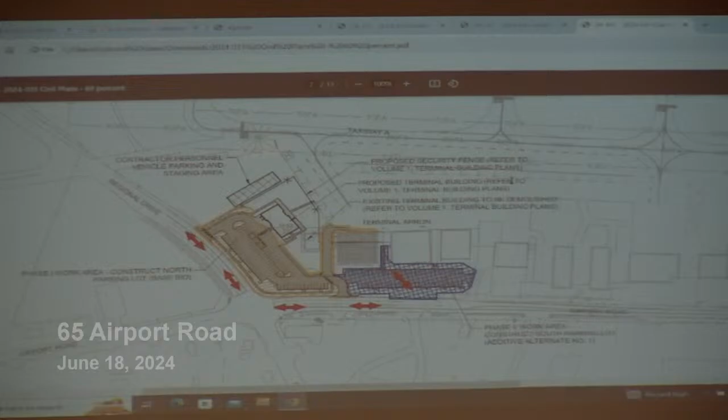The design that's in front of you here tonight is at approximately 60% completion, and it's likely to change quite a bit between now and actual construction while we work through the process with the federal government. The design of the project is the result of a 2019 collaboration with city officials, community members, and airport stakeholders. The idea was to reimagine the airport terminal into something that both aviation and non-aviation users would be attracted to use. The current design is to reorient the terminal so that it's the focal point as you approach the intersection of Regional Drive and Airport Road with a more modern design terminal building. We're proceeding through the process now under RSA 674:54, which governs governmental land uses, in which governmental land uses will appear before the planning board and will take comments from the public and the board and receive feedback on the normally applicable land use regulations that the community has.

We will take that feedback back to our design team of Jacobs Engineering and incorporate as much of that as is feasible to do through the grant process and through the design process. And our goal is to comply as much as possible with the city's regulations as we move forward. We certainly would appreciate any feedback that the board and the public has here tonight. We've already received the memo from planning staff and engineering staff, and we will work to incorporate that as much as we can again in the project.

Martha Drufker from the engineering division is the lead from the engineering side of things for the city, and I know that she's working closely with Jacobs to try to ensure that as much of the project is compliant as possible. We're going to endeavor to do as much of this as possible. There is a fairly tight time frame with the federal grant guidelines that we are hoping to get through and out to bid within the next month or two, which is an extremely compressed time frame because we just started getting into design of this in March, really.

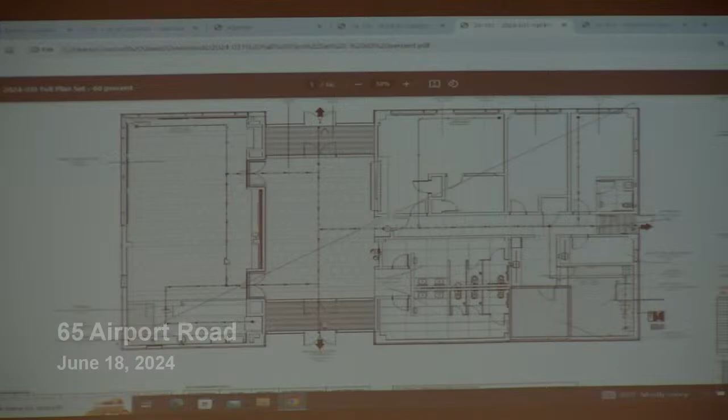This is still intended to be a general aviation airport. We're not looking to do passenger service here, obviously. But we are hopeful that that space could be utilized by community groups and others as an opportunity to both showcase the airport and bring the community into the airport that typically doesn't visit there today. Okay, great. Councilor Todd? Yes, thank you. While you have that up, can you just point out what the other spaces are? Sure.

In this drawing, what they'll be utilized for? Generally speaking, this area here would be the counter for the car rental agency, airport manager's office, some tenant space potentially in this area here, pilot's room here, men's and women's rooms. We scroll down here. This is the electrical room, and this is a pilot area for them to, if they need to get some rest, take a nap, get some separation from the general public. And then the main lobby and the public circulation space.

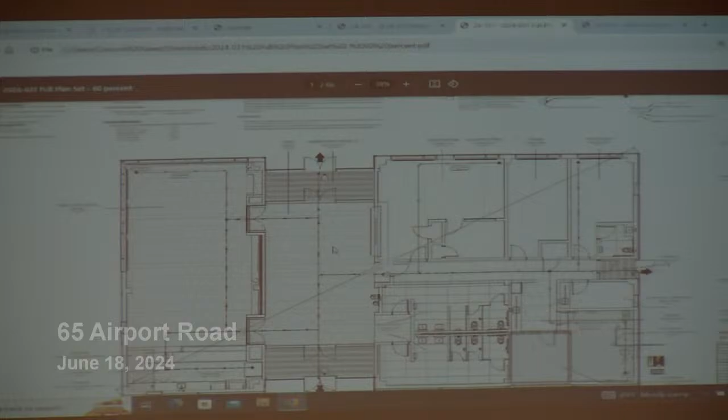How many square feet, Tim? Roughly 5,200 square feet. So it's a good size, not a tremendously large facility. And single story? Yes. Follow-up question. Sorry, if I could. Yeah, thank you. No, it's all right.

So there's no space set aside, for example, for an aviation flight school? Not in this area currently, although that tenant space could potentially be utilized, and I think the original design from Jacobs was assuming the FAA may need some space in there, but based on conversations as we've gone through in design, it's not necessarily that they would need that much space, so there may be opportunity for the city to obtain some lease revenue from that space.

Dina, follow-up to Councilor Todd's question. Pull a little forward so they can hear you. Sorry. As a follow-up to Councilor Todd's question, is the flight school gone that was there before? There was one in a building over. They're still there, to my knowledge. I have not been informed that they've left at this stage.

And I know one of the concerns that our current airport operator has, the existing terminal and the really early on design had some overlap with the proposed new terminal, and there were questions about whether or not we would be able to do full demolition and then construction. The commitment by the city at this stage is we're shifting the location such that we will be able to keep the current terminal open until the new terminal building is complete, so there should not be any downtime where we'd have to temporarily relocate anybody out of the terminal.

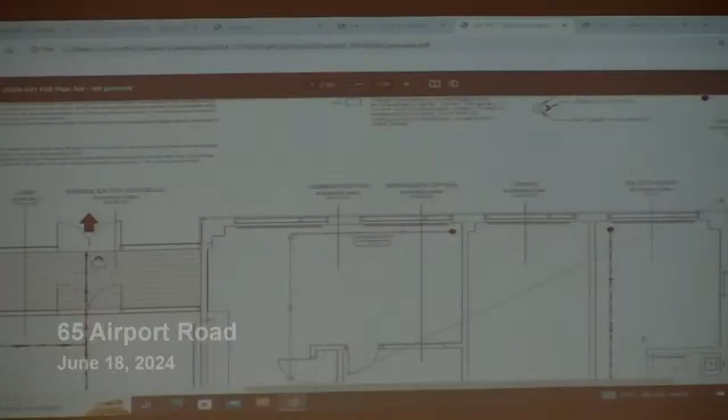Okay. To follow up again, do you know offhand what the space is of the current flight school? I do not. It might be bigger than that. That's what I'm wondering. I think we have some public testimony coming that may address that, so we'll let that come up when it comes up. Okay. All right, thank you. Jeff?

So I think engineering did a great job going through these. A couple of things that I'd like to reiterate are the locations of the driveways to the intersections and the need to cut through some of those long queues that happen at that signal to get in and out. The crosswalk, when you first come in that main driveway off of Airport Road, is at such an acute angle. If there's a way to shift the parking over or take one parking space out there and add it someplace else, to straighten that crosswalk, I think that'd be highly advantageous, unless that little section is gonna go away because the sidewalk's going diagonally into the intersection. We're in complete agreement that those things need to be taken care of.

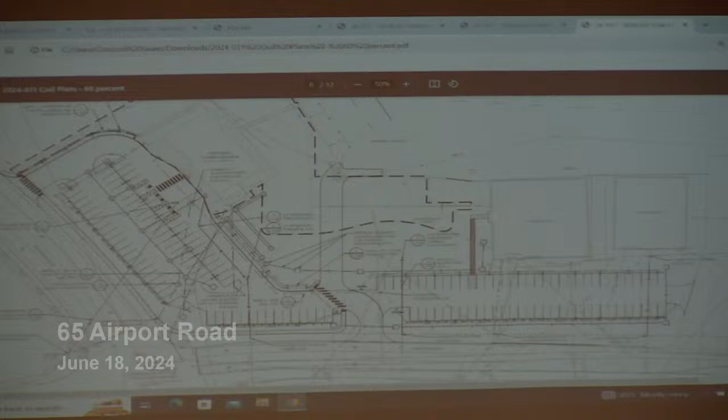The other thing I noticed, I forget which plan it is, I think the utility plan shows a future handhole for vehicle charging stations on the southwest corner of the main parking lot island. The way it's laid out, that would preclude having any ADA spaces with EV charging potential. So if it's possible to also put a box maybe at the other end. Sure.

That would be great, because they also have electric cars, and as the future goes forward, more and more people will. Separate grant applications that are in the future for me, yes. But I'm just saying, if we can at least install the conduit and that pull box or whatever's needed, I'm not saying you have to install them. Sure. But at least you don't have to dig the parking lot up again to do it. That's the big issue. Understood. Thank you. That's all I had. Okay, good.

Thanks, Jeff. On the plan that you've got contractor, personnel, vehicle parking, and staging area on the inside of the fence. I don't see a road or anything that's there. I don't know how that's serviced, but I don't know what the plan. Trying to think which plan. It's the second sheet in on my packet. The civil or the full? Civil. Civil, all right. G100, the general plan. Yeah, G100, 2 of 12.

So it's your colorized one that you had the blue hatching on. So it's got a little box hatched out there that says contractor, personnel, vehicle parking, and staging. Is that a permanent, or construction? No, that is not permanent. That's just for construction. Okay, perfect. Okay, any other questions?

Dina? It's a beautiful building. I can't say I've seen something like this in New Hampshire. What type of glazing are you using? Will it be comfortable in the winter? I know winters aren't as cold as they used to be, but that is a lot of glass. I'm not going to be able to speak well to the actual architectural design and glass standards and glazing. However, based on the conversation we had with the Architectural Design Review Committee and the process that's been ongoing since 2019, we're confident that this is going to be more than energy efficient and should work well. Triple glaze and that kind of thing. Yeah. Okay. Hang on, I got David Fox, yes.

Just an interesting question. Do you have any data on utilization? I know other than race week, when all the corporate jets are in there, typically, I know general aviation. So I'm looking for what's going to support this particular investment by the city in terms of its utilization? I will allow the airport manager, who's going to be coming up for public testimony, to probably answer that in terms of statistics.

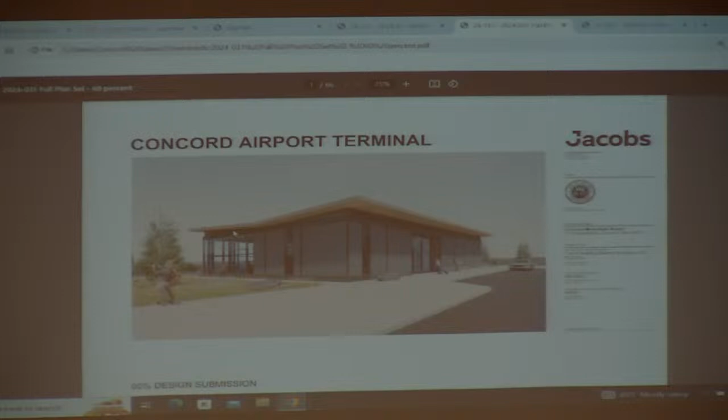Yeah, I'm just wondering if the roof is meant to look like airplane wings? If that was intentional? Not having been here in 2019 when it was designed, I know it went through a public process with stakeholders and the public and resulted in that design. That's pretty cool. And the other question that came at ADR was, yes, there is appropriate drainage set up to handle the roof drainage off of that.

Make sure it's not built by Boeing. We'll have to worry about the bolts falling.

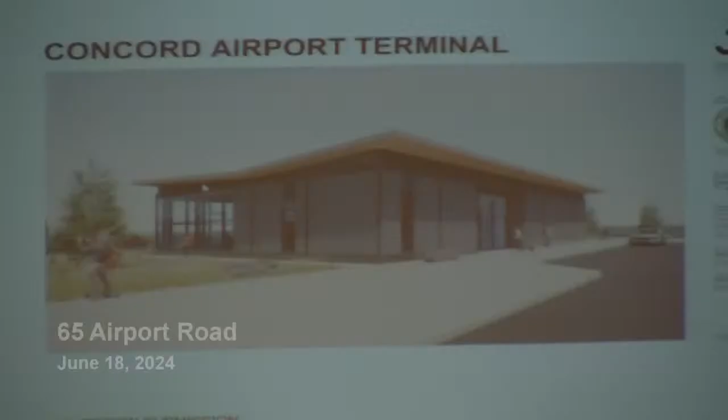Yeah, that's right. It couldn't look more different than the new building across the way, so you got contrasting wood and arch frames. Any other questions from the board? Any member of the audience have any questions or concerns about this? I'll let the manager come on up if you can answer a question.

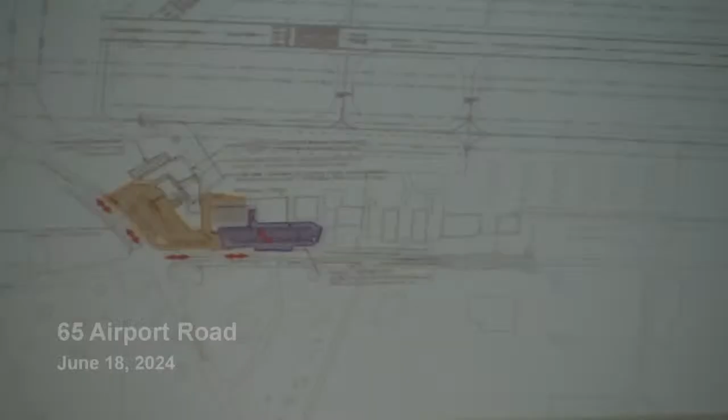Looks like you got a big office here in this whole building. Cut that in half and make it a space.

Welcome to the table. If you could state your name for the record. My name is David Rolla. I am your current airport manager and operator for the city of Concord.

Great. I apologize for my condition. I feel like a burnt tater tot after 12 hours outside today. Well, you don't look like a burnt tater tot.

So, as you said, we're gearing up for race weekend, and rental car people are already starting to arrive. Had 7 or 8 rental cars go out just today. And we're looking forward to a busy weekend. So I saw your hand go up, but I don't remember what the question was. I think that particular question was around the flight school, the councilor's question about, is the flight school still there?

Yes, our flight school is still there, and the relative space we are operating the flight school out of right now is about 1,600 square feet, less the rental car counter that's in that same space. They probably have about 200 square feet. We haven't quite figured out, you're right, that area that's lined up as airport manager's office, I think it would be more appropriate to call it airport operations area.

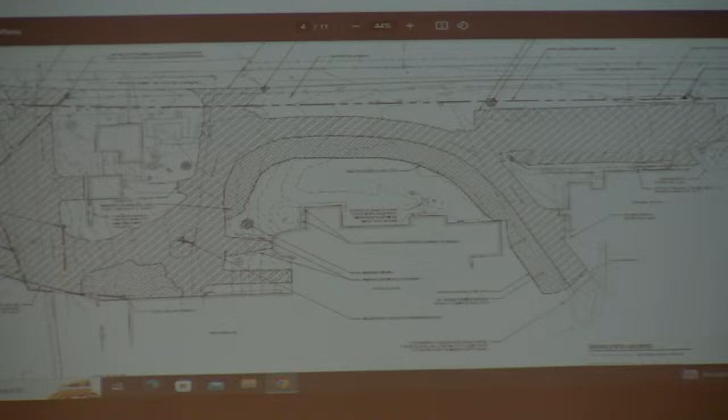Okay, so on the right side of the plan, all the way to the right side? So it's literally right about there. There's your signs that you're showing reinstalling on city property, and then there's a tree right there. It's quite large. It's gotta be at least 4 feet in diameter. It's enormous. And it's got big arching branches. And it's not a maple, I don't know what it is, but it's different.

I wish Suzanne was here. She's probably yelling at the TV now, telling me what it is, but I don't know what it is.

Okay. Well, I'll certainly have that. Anything that can be done as far as protecting the root system in that area would be much appreciated. Yeah, well, if it's on your property, then I'll make sure that we protect it and don't touch it.

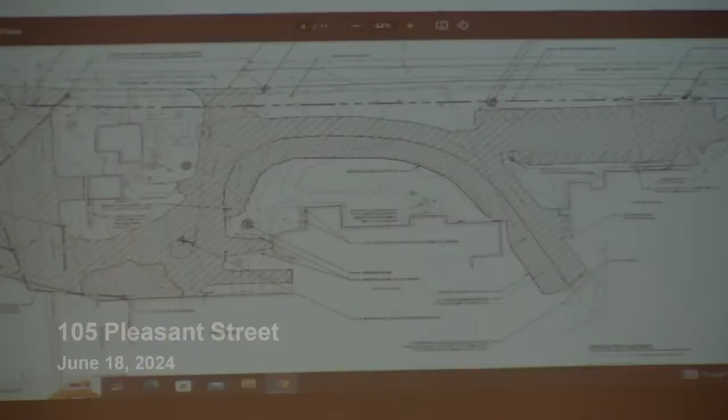Okay, I see another hand. Matt? Yes. Question is, I'm looking at Google Maps right now, and it looks like there's 4 curb cuts existing along Pleasant Street. Are there still going to be 4 curb cuts, or are we going to try to reduce any of those? It didn't look like any were being reduced. I think there's 3. It looks like the first one going up Pleasant Street services the old doctor's houses. Then the main one, and then the single one that goes into a parking lot. I don't know what that one is.

Maybe that's not a curb cut. I think there's only 3. And then Industrial Drive. Okay, I'm just curious. No, that's fine. We're planning on basically keeping everything as is, but just renovating, updating the base. Alright, thank you.

Okay, other questions? Any member of the audience have any questions or concerns about this application? I'm losing people left and right here. Okay, thank you very much. There's no action needed by the board, so we don't need to do any motions. We will let you go. Thank you very much, all. Appreciate it. Thank you for your time.

All right, that brings us to 8H on our agenda. If we could read item 8H into the record. New Hampshire Land Consultants and New Hampshire Sustainable Communities LLC, on behalf of Thomas Cheney, request approvals for a major site plan application, architectural design review, conditional use permit for driveway separation, and a condominium subdivision application for an 83-unit condominium development at 153, 159, 165, and 169 Fisherville Road in the general commercial district. Also requested are waivers from certain site plan regulations.

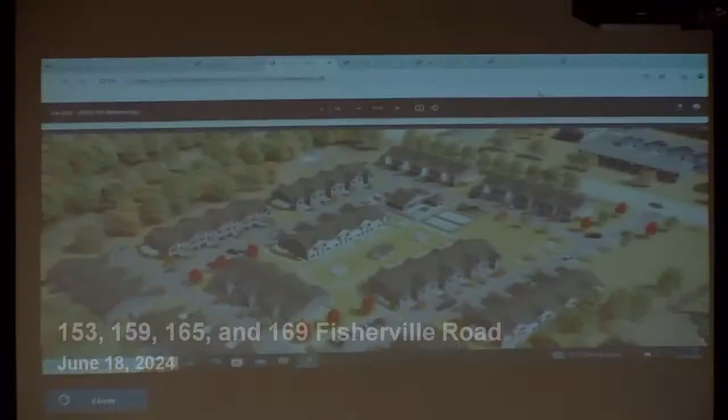So again, Scott Frankos, New Hampshire Land Consultants. Before we came in, about a year and a half ago, it was 100 units. And it was actually a lot bigger than that the first time around. But we've pared it down. It's 83 units right now, which is 10 units per usable acre of the land. Currently there's 4 lots with 5 curb cuts, about 600 feet of frontage on Fisherville Road, and the site's serviced by water and sewer, of course.

So what we're proposing is an access off of Fisherville Road, which is south of Pinehurst and north of, forgive me, I can't remember the name of the road. Windsor. And on the plans, we currently show an island there. That is going to be eliminated per the traffic meeting we had, and the entrance is going to be shrunk down to 28 feet. Like I said, we're proposing 83 units. There's 11 buildings. 7 are 8-unit buildings, 3 are 7, and 1 is 6.

In addition to that, we're adding a bunch of amenities to include a 1,600 square foot clubhouse with a pool and a spa area, a patio area, a couple pickleball courts, a playground, a dog park, and a 12,000 square foot lawn area as you pull into the property. It'll be to your right. There's a trail system currently in place around the site that will be enhanced. And then there are 2 fire pits that we propose in the middle, proposed to be gas fire pits, not wood-burning. Shane can talk more about that. I know there was a concern on that from an abutter that had sent the letter in.

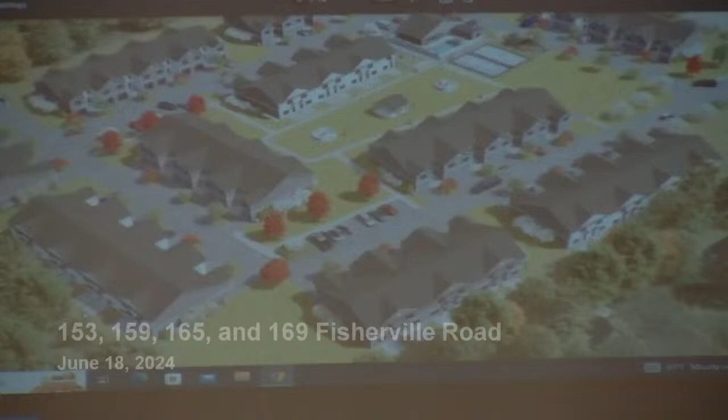We are asking for 5 waivers and 1 conditional use permit, as I think Anne Marie stated. And with that, I'll turn it over to the board, or if Jeff or Shane have any more to say. Okay. I do have a couple of questions. So you mentioned snow storage is around the units. So on site, you're not trucking anything out? No. Okay. Lighting? Lighting was prepared by Sharon Lighting, and there's a plan set in there. Okay. Any signage? Not proposed.

Okay. I did have a green space comment. So if I'm looking at plan 14 of 32 in the attachment set, there's a fairly good sized space right in the middle of the lot. It's got the fire pit, 16 by 24 covered patio, and then a fire pit at the other end. I don't know what the draw is there. I don't know if you need 2 fire pits, but I'd love to see some of that space opened, either putting the covered patio on one end and leaving some open space in the middle for a soccer game or whatever. I see the space in the southwest corner that you got almost a baseball field already set up. So I know there's some open space there, but you don't have a lot of open space for the number of units that are here.

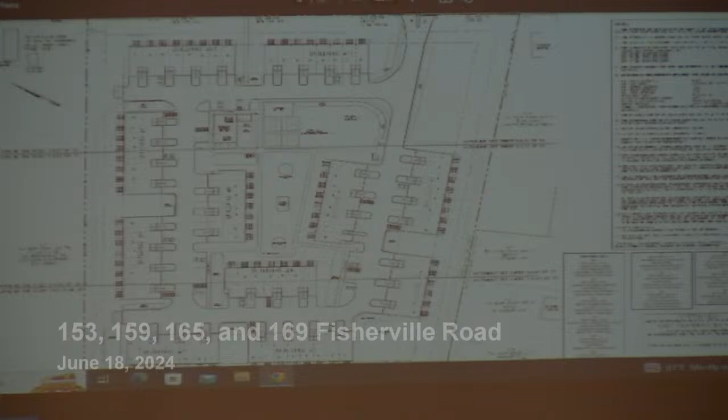And I'm asking a lot of questions and not giving any time to answer, but the southeast corner, so the front corner towards Fisherville, is that going to be accessible? It's a detention area, so occasionally there'll be water in there, but flat. Yeah. Okay. And more in this area too, also right by the pickleball courts, that's an open 12,000 square foot area. Okay, so again, just for what it's worth. Earl?

Thank you. Thanks for all your hard work on this. I know you've been doing this for some time, and your community meetings have been great, so I appreciate that. We did receive a letter today from someone that lives along Alice Drive, wondering about buffer along the chain link fence. Is there a landscape plan in here? Yeah, I couldn't tell from that what the trees were. Have you thought about evergreens along that chain link fence?

The concern was when the leaves are off the trees and so on and so forth, on what you would see from that neighborhood into your neighborhood. Any thoughts on that? Currently, what we're showing is just trying to maintain at least a 15, 20-foot existing buffer that's there. The letter mentioned mature trees back there, and we're proposing a trail to come down and around that area as well. We haven't proposed any other landscaping back there other than maintaining up to like a 20-foot buffer. And there's no room for a berm. The berm is kind of because their site's here and we're here, and there's a valley, so the berm really wouldn't work. Okay.

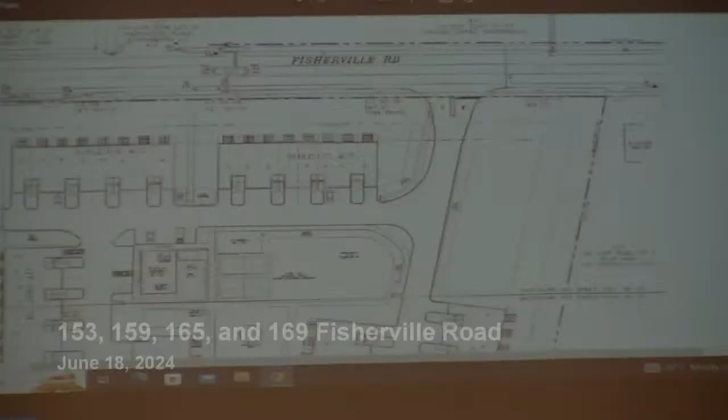So I don't know if there's some flexibility to shift, maybe move the snow storage to the other side, make it bigger on the other side type of thing, and shift it, and that also puts that entrance closer to the crosswalk out at the street, which might be more conducive. Same thing when you come in the main entrance driveway, you have the sidewalk that comes around and then just sort of dies at the first unit, and it doesn't cross there or connect anyplace else. So if it's possible, look at that.

Also, you have your gazebo and your fire pits, but you're not calling out any sort of walkway to make them accessible. So someone who does have a disability might have a hard time using those, walking through the grass. So maybe for one fire pit or the other, there's a possibility to make a connection to make it a little bit more friendly. What's that? Like a brick walkway? A brick or something, yeah. It doesn't necessarily need to be from both sides, just one side or the other. I think that would be great. And depending on the types of people that use the facility, I know not every unit maybe is accessible, but that doesn't mean guests or whatever.

On the driveway, and this may change a little bit now that you're taking out the island, you have the fire truck turning right in and right out, and never turning left in and left out. I understand the fire station's in Penacook, but if they're on a call, the main station downtown is going to come up, and they're going to need to make a left in. Yep. Or if the fire truck is heading back to the Penacook station, it needs to make a left out. So we need to check that, please.

And I noticed there's a couple spots where it's odd because your fire truck is there, and it shows the box shape, and then there's a dashed line that represents the corners of it, and they don't line up. Okay. So when I look at that, I'm kind of like, what's going on here? And it seems to cross into a couple of the driveways where people would be parking cars. I think it can be adjusted, it's just a tweak. Yeah. But I just want to make sure that if the fire department and engineering are looking at that, they're getting an accurate plan.

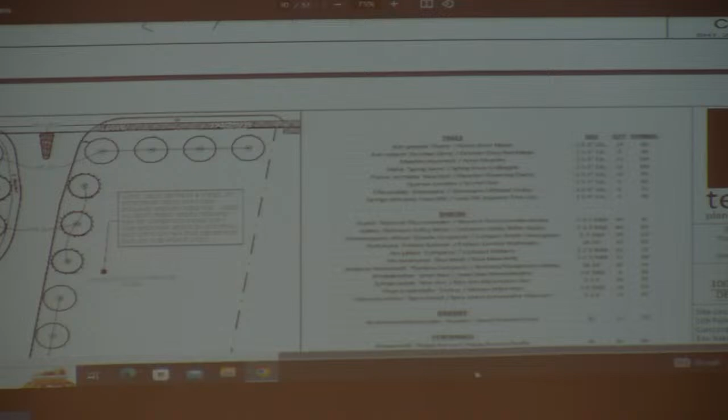It's the lack of landscape that threw me. I couldn't find it. There's more than normal, the big trees that I normally see on a landscape plan, not the right color there. Like we see some of them. Yeah. But I do appreciate the additional green space from the first time we've seen this. So the crab apples that are in and around parking spaces, I just want to make sure, because it is near parking spots, sometimes that drops on cars, so it was just a consideration. Not that there would be cars parking all the way out there, but it is near.

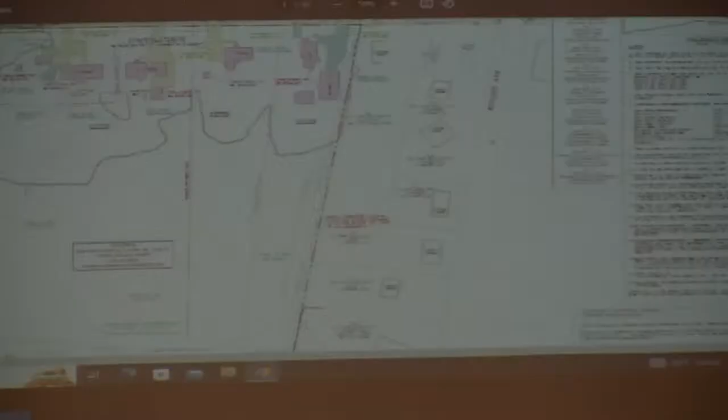And currently, as we mentioned before, on the back side of the property, the one that is going to be abutting Alice Drive, are there existing trees at all that there would be some conservation of? I can only see based on what's there now, but it was kind of hard and wooded. The landscaping plan doesn't show existing. Yeah, that's what I was asking. This kind of shows what's out there for wooded. The green area is all a wooded area back there, and we'll preserve as much as 15 to 20 feet. I think it benefits not only the new residents, but the existing residents, so that they're not just sitting on the porch looking at each other's backs.

Mr. Chairman, if I could. Yes. Would it be possible on the landscaping plan to show what you're intending on maintaining for those trees in the back? Because it is kind of hard to tell, and I think that might go a long way to making that clear to some of the abutters and other board members where that new line would be. If it's all woods now, it's hard to tell, so that might help clarify. And correct me if I'm wrong, did you put the same little islands between the units across the street and tree plantings in those as well? Yeah. Okay. Councilor Todd.

Thank you. Following up on these comments, I think the suggestion to really be able to see what you're planning to save would be very helpful. And as was mentioned earlier, the abutters are really concerned about leaves falling off the trees. I think you've chosen a nice selection of trees, but if you could consider evergreens, at least along the Alice Drive area, so that some of the residents will have a bit of the wooded view they've grown accustomed to. That would be really helpful. Okay. Questions from the board?

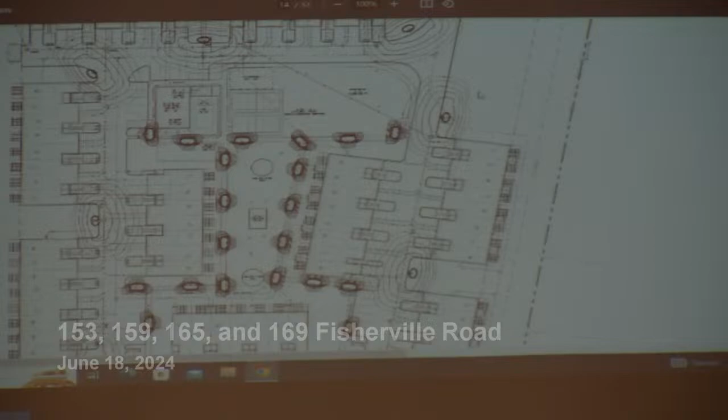I actually do have one more. Lighting plan, normally I'm used to seeing values of the contours, and all I see is the circles, and then everything beyond it is zero. If you could just re-look at that, sheet 14 on your set. Normally those little contours around each light say 0.2, 0.4, 0.5, and a lot of times we get spot shots because that light does go a little beyond the contours. Everything beyond the contours is 0. So did a layer not get turned on when it was printed, or is something missing some labeling?

I just want to make sure that, once they all get installed, not all the neighbors are going, whoa, this seems really bright out here, we didn't expect that. We do use Sharon Lighting to do the lighting, so I'll revisit that with them and make sure that everything's correct on it. Like I said, it could be just a simple layer. Yeah, I do this all the time. You print and realize after, oops, a text layer got turned off or something. That'd be great.

There is values in there, but I do see what you mean where they drop right to 0 after the contours. Yeah, and it was kind of hard to tell because some of them drop off quite a bit different from one side to the other, unless they're all cut off figures everywhere, which is hard to tell because of the way the contours are.

And you said dumpsters, there's 2 dumpsters, are those at the end of the hammerheads there on the north, east, and west side? Yeah, on the north side, the northeast. Okay. And fence around them, and then I saw some plantings around them as well? Yes. Okay. Other questions from the board?

Dina? Thank you. Looking at the sidewalks, are you kind of envisioning a shared road and pedestrian in your plan? Because the sidewalks do kind of end in strange places, are you envisioning people walking in the street? Or utilizing the grass, kind of thinking about how the sidewalks could be added? Anywhere specific that you can point to?

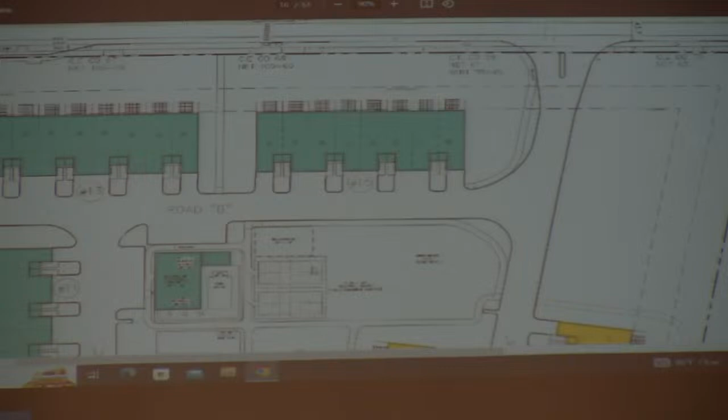Well, definitely right when you enter that driveway, where it ends there, and maybe extend it 90 degrees, and then you put a crosswalk maybe, to go into that open space. We could. Yeah, and during the ADR review, there were some comments too about the sidewalk and making them more curvy. As engineers, we like angles and straight lines. Yes, straight lines are good. But we can add a crosswalk there definitely, and one of the comments that came was this walkway we reconfigured because it wasn't lining up with the trail, so it is now.

And if I understand you, what you're saying is people going in between the residences are gonna have to walk in the street to get to all the sidewalks. Correct, that's kind of what I'm wondering, if that's their plan. I think that's kind of what it is, because it's an internal development, not a city street, it's not gonna be as busy. That's what people use anyways. Right, I mean, you look at, what is it, Abbott? The development across the street did the same thing, right? Yeah, the one across the street was approved this way.

Did I hear you right saying that the pedestrian island in the middle of Fisherville is gonna be going away? No, not the pedestrian island on Fisherville, the island in the driveway. The island in the middle of the driveway? Right, not on Fisherville, that one stays for safety. Okay.

So it prompts a question. I know they're separate developments, but do this development and the one across the street share any commonalities? There's no pickleball on the one across the street, so are the people gonna be coming over to use the pickleball or the dog park? Right. When our plans were first submitted, we were tying into sewer across the street in conjunction with them. That's no longer the case. Okay. So there's no utility connection, there's no other amenity connection. Okay. And the exterior perimeter fencing, how tall is the fence that's gonna go around it, and is it chain link? I'll have to look at that.

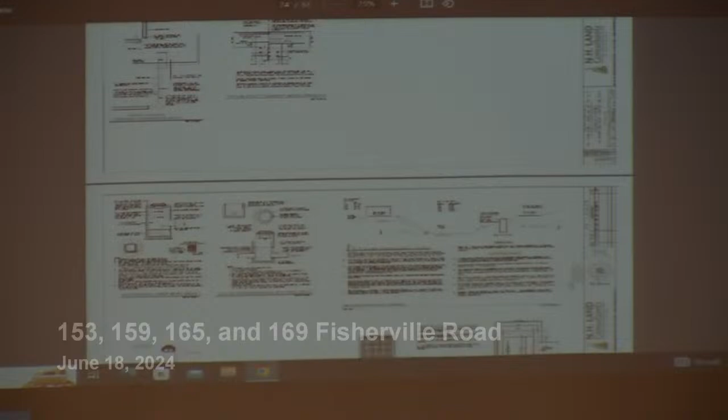Or black wrought iron, 8 feet tall, hand forged? No? With brick pillars like the National Guard. Yeah. Be lovely. Sort of like the armory. Sort of like the air guard, Chorlian's project. Yeah, the air guard fence. You don't need to know right away, but it's gonna be a question regarding screening and neighborhood intrusion, if you will, so people are gonna wanna know how high the fence is and how pretty it is. I'm gonna guess that's gonna be a question.

All right, one quick one. The trail, is that going to be accessible so that the trail will come flush to the curb and not have a step up from the roadway onto the gravel? Currently we're showing it as if you step up that 6 inches from the curb. So you wouldn't consider putting like a ramp so that somebody in a wheelchair could easily be pushed around? Or a tricycle, for a child, not having to mount that curb. If you're only gonna be 6 inches higher, you could do 6 feet of some sort of paved or concrete ramp. Yeah. That'd be great. Put that in the check mark box.

Good job, Joe. All right, we're gonna have you guys step back. I think we got some public testimony, and then we'll probably have you come back up. So don't go far. Any member of the audience wish to speak to this matter? Come on up.

You got to enjoy the table. Just be careful with those chairs. Don't pull them out too far. You'll fall right over backwards. I'm familiar with that. That's right, there's no handicap access in this building. Well, there is an elevator. If you need it, we can get you on the elevator. Don't know where that is. Well, welcome to the table.

And I think the abutter's driveway is right on the property line, right? Yeah, it's really close. Right there. It's like 150 maybe. It's about 150 when I scale off the plans, depending on whether you go center to center, edge to edge, depending on how you take that dimension. Okay. Correct, it's about 150, which is what I indicated in the staff report.

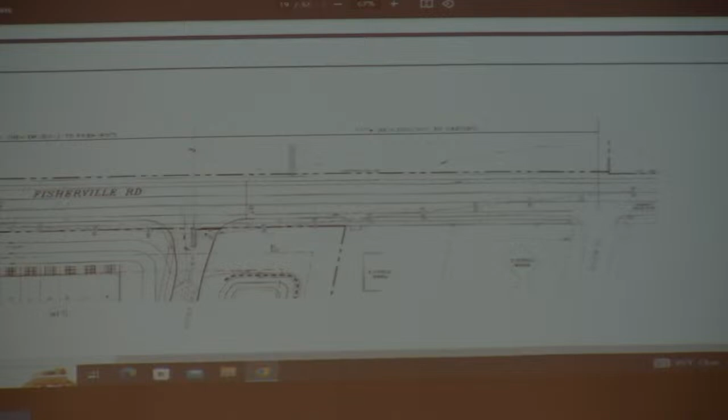Yeah, we have 377 feet from Windsor and 273 from Pinehurst. But if you look at this sheet, which is 19, it'll show you clearly where their driveway is, right on the property line. And then we're 150 feet north of that. And just, did we need a waiver for that? It's a conditional use permit. Okay. And that has been requested. What's the variance? What's the difference?

Well, the difference is the zoning ordinance has a requirement of 200 feet, and the site plan regulations have a requirement of 250 feet. And zoning typically wins out in those. Typically, we go with the zoning. With the zoning. So 50 feet. Sure. Mr. Chairman, if I could.

Yes. Looking at the angle the driveway comes out, is it possible, like, after the first intersection, to turn the driveway and have it come up more 90, so that gives a little bit more distance from their driveway? I don't know what your grading is on each side. When we rework that, get the island out, we could definitely.

Yeah, so that first kind of internal turn to the first house, if it's not gonna impact, because it looks like an underground system or something there, if you can turn it, that might give you an extra 15, 20 feet or more of separation between the two driveways, and I think narrowing it helps. Because right now, you've got the big island there, which makes it look very daunting. But if we now narrow it up, take the island out, if there's a way to realign it.

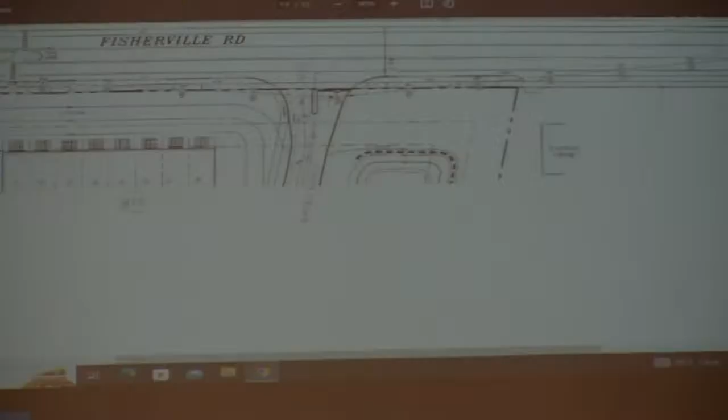What are the telephone poles? Are they on this side or the other side? This side. They're on this side? The utility poles. Old-fashioned telephone poles, with wires instead of cable. That's exactly right. Depends on who owns it.

Okay, other questions? Fencing, we can't dictate fencing, but you heard from the neighbors, they'd like to see some privacy. So whatever you can do to make that a friendly neighborhood piece. On the construction fence, I think it's a great idea. I think across the street, they've put the fencing up. Keeps the dust down. Any large construction company's gonna do that to protect themselves.

So if I heard the abutter, they're talking about not wanting to wave to people. It looks like that house is where the open space will be. So there won't be any units directly behind them, correct? Right. No trees, but there won't be any building. Now, you have 150 feet before the driveway, so it's a fair distance. It's certainly a lot farther than Alice Drive. I was expecting some people here from Alice Drive, they're gonna be looking right in the back of the buildings.

Other questions from the board? No? Okay. We'll close the public hearing. Thank you very much for your testimony. So again, in our packets, let me get back to my piece here.